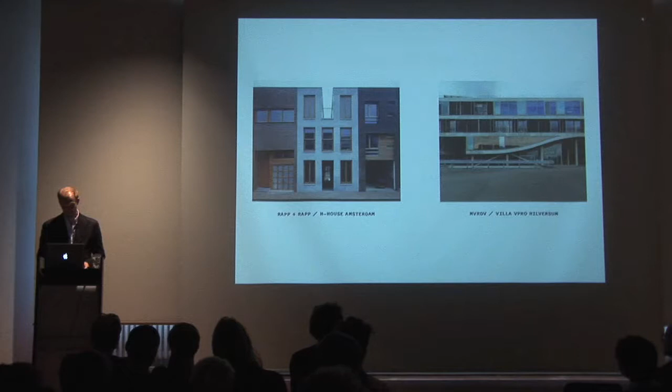And of course there's common ground between these two worlds, and I think this also reveals a bit of a dilemma, a productive dilemma. We try to find a balance between these two worlds. Now, then I'm going to show you, that's part 3, a cover of an important book for us. It's important because we think architecture should definitely be able to be part of contemporary visual culture. Yet simultaneously, architecture should also be able to resist this, you could say, one-day fly dimension that we find in blogs, Instagram, magazines, and other image dumping media.

Because the problem with this is that it appears to flatten out the knowledge, love, and efforts that builders and architects are doing in the making of a building.

For me, it's clear that architecture should not attempt to keep pace with the speed of these everyday digital environments. I'm actually convinced that the design of a layered and ambiguous building is a strategy of resistance, or of survival even, by simultaneously offering a certain amount of instant gratification, yet avoiding the possibility of a singular reading.

I would say the seeking for complexity and even contradiction would be a way to make an intriguing building and to open it up for more discoveries on several scale levels. And this sometimes brings us into the league of postmodernism.

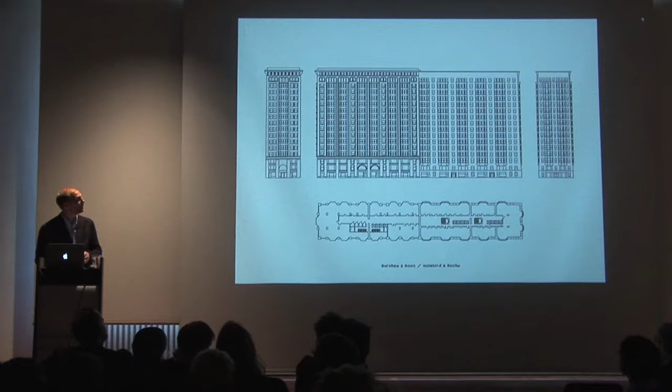So this part by Holabird and Roche is a complete steel structure and was the material of the future at that time, and sped up the realization time tremendously, while this more abstract building part by Burnham and Root is one of the tallest brick structures in the world. It's about 17 layers, and it's load-bearing brick combined with some steel reinforcements, but the main material is brick.

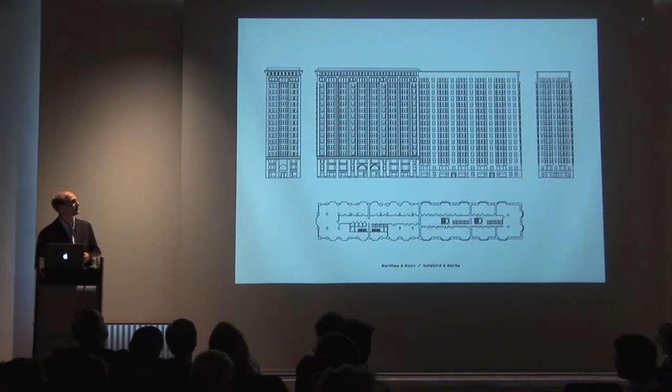And the whole idea of decoration is completely different, because this part, the more massive part, is designed as a monolith. The beauty about it is that all the decorations come from the volume, or if you like, the sculpture of the volume itself. So there's not a strict division between plinth, middle, and top.

No, there's a big belly bulking out, which actually makes the plinth, resulting in reliefs of almost 75 centimeters. And then the bay windows, or oriels, have beautiful rounded bricks that actually add up to the plasticity of the building.

You get the feeling that the bay windows actually bulge up out of the surface of the facade. This is the last image I'm going to show of this building: the corner, the edge of the building, starts very sharp and then goes up all 17 floors, ending in a rounded cornice, but that already starts here.

Very refined and beautiful. In a rather abstract way, you could say it simultaneously celebrates the possibilities of the material of brick.

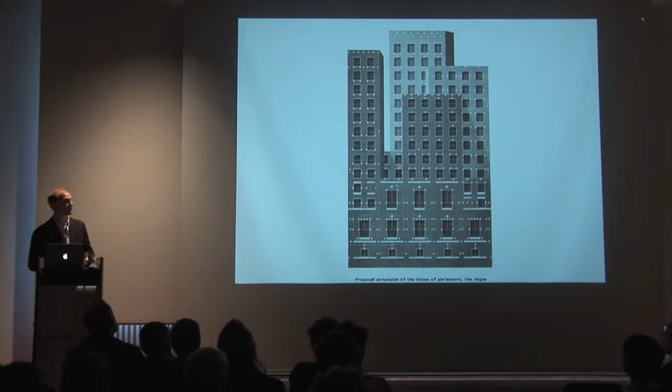These drawings are also helpful to formulate themes for facades or thoughts about decoration and how to relate to the existing neo-Renaissance complex of the Dutch Houses of Parliament.

We also make a vedute, where we make a combination of our own buildings with buildings of colleagues and people we admire, and bring them together in a collage. The act of drawing is something we take very seriously and also see as something to engage with and as a field of testing.

When we were invited to take part in this exhibition in the Deutsches Architekturmuseum in Frankfurt, we did a proposal for a small set of objects, and we had no clue what they meant, and gave them a title: The Good, the Bad, and the Ugly.

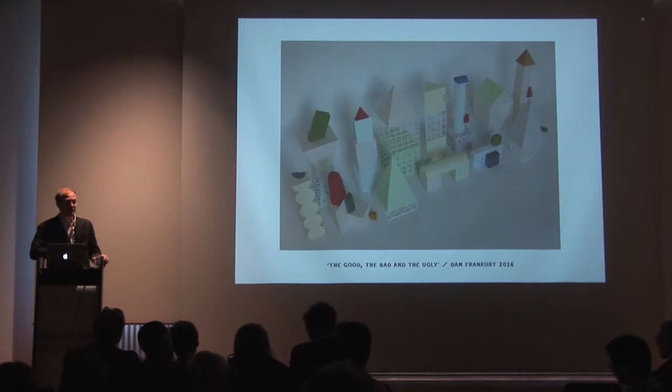You could say the making of these plaster objects, we imagined them to be buildings and simultaneously be objects. I would say the biggest object is about this high, so they're really small. And only later, post-rationalizing, we try to give meaning to them sometimes, which is also valid.

So we then used the things we found for an exhibition design we were invited for at the New Institute in Rotterdam, and then we used the things we discovered to make bigger pavilions in an exhibition, which was about the surface of things.

For us this all is part of 'make no little plans,' but give meaning to even the small things you do. We try to avoid making everything heavy. We try to see this as one big field for playing, testing, and trying out.

Now, this is one of the oldest projects we did, the pavilion on the River Maas in Rotterdam. I always like to tell a bit about it because it's such a funny project. It is a temporary structure in the city center of Rotterdam.

So quite a central spot, and it was a small competition. We were invited to take part to make a pavilion for the city beach. Now, let me explain a bit about the city beach. You will find this in every city, like Berlin and Paris and other cities in Europe as well, where city dwellers are offered a small beach to avoid traveling to the real beach.

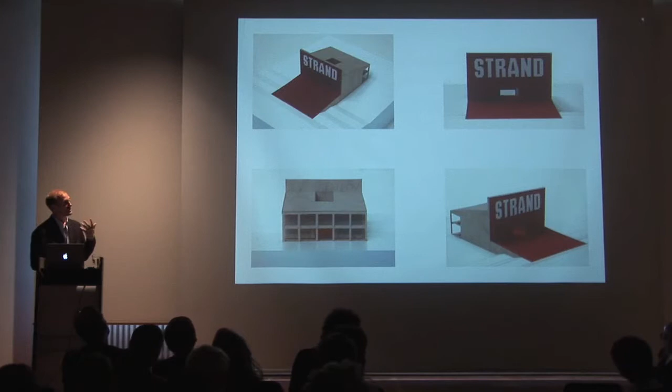Our beach pavilion is something that did not really engage with the sand, I would say. It tried to make two faces, one to the beach itself and one to the city. We had large discussions with our clients to keep the announcement, the billboard, clean, and not to write Coca-Cola on there, but to announce 'strand,' which is Dutch for beach, and treat it as an ironic billboard for what was happening behind it.

As you can see, we managed to keep it clean. There's only a small sign here. It's a combination of several typologies: a billboard combined with a small cabin. It's a wooden building with a steel structure, clad with wood.

We combined the typologies of a so-called gatehouse with the idea of signage, publicity. We were completely intrigued by these beautiful pictures by Berenice Abbott, taken in New York several decades ago, where you can see the signage sometimes completely taking over the building, so you sometimes even have the idea that there's also a building behind the signage.

Now we tried to engage with that idea that the signage would take over, because we thought it would be important to be brutal and bold and visible in the cityscape. In the middle of this billboard, there's a hole. When you are welcome, the gate is open, and when you're not, the gate is closed. Behind the gate, there's a hole in the roof, so the light shines in, which makes it more attractive to enter.

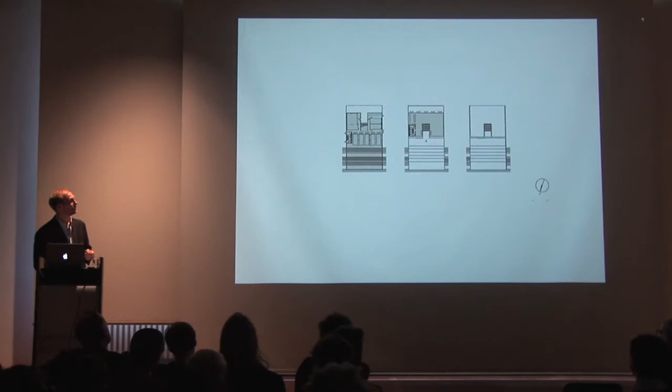As I mentioned before, it's like a Janus head, the building. So big to the city and small and intimate to the beach, where it has detailing, where it has materiality, doesn't need to be abstract and big anymore. Complete different character. The character also refers to, I would say, American rural typologies.

I will tell a bit about that later. First, I show you the plans. On the ground level, there are containers and a kitchen, and on the first level, where you enter, there are the toilets and a bar.

This is the section. So if you choose to go straight ahead, you will go down the stairs and immediately end up in the sand with your feet.

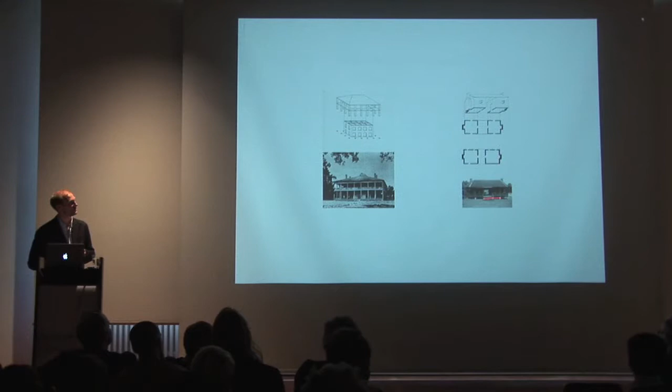For this character on the beach, we were looking at these nice rural typologies that you find outside the cities in the United States. Typologies like a planter's house, where you have a veranda going all the way around, or a dog trot house, which is a very strange typology where the house gets split into two and has a gap all the way through. There are several stories about why it evolved like this, but one is that the wind blows through and there's natural cooling. The other story is that the sheep were not daring to cross this house, so they would always stay within the fence here, but I'm not so sure.

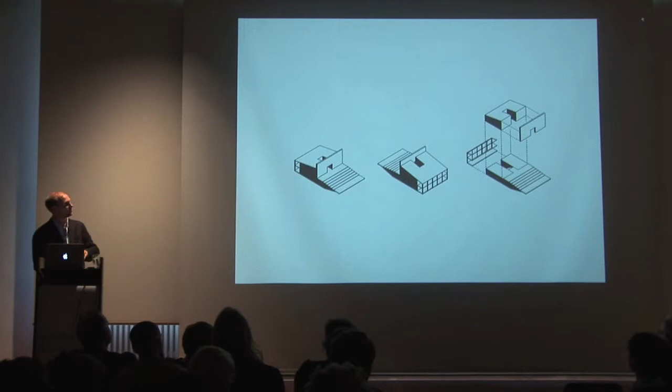As you can see in this axonometric, we try to clearly combine these elements and bring them to one singular form again. It was quite a popular spot. It was there for two times, and the deal was that the pavilion would be there for three years.

It's non-insulated, so it's only there for summers. But then it became a tiny bit too popular because there were parties organized, and in one of the parties there were the Rotterdam hooligans, and they made quite a riot with the police, and then the mayor of the city decided to stop this beach here.

So no pavilion anymore. The pavilion got sold, and I think it's now somewhere in a recreation camping park in the south of the Netherlands. And we don't dare to look at it anymore because we kind of lost track, also on purpose, because at a certain moment you also have to let go your babies.

Although we love this one very much, it was also our first lawsuit where we tried to be in control as architects about what happened with the pavilion. But in the end, I think it's a bit connected to temporary buildings that at a certain moment you have to let go.

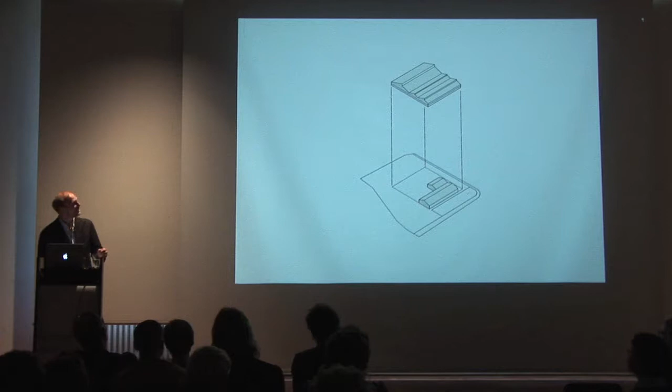Now, this was the existing complex, and the client was doing a lot of business with architects, but needed a renovation of this complex, and was a bit shocked that he did not invite an architect while he was already talking with a contractor to do a renovation and an extension. So he called us and asked whether within the bandwidth of the limited amount of time we would like to think about what we could do with this family of production facilities.

And we were, of course, bound to the existing grid. We looked at what a factory hall actually is and what is, you could say, significant or characteristic. And we thought the shed lights would be a beautiful motif to use.

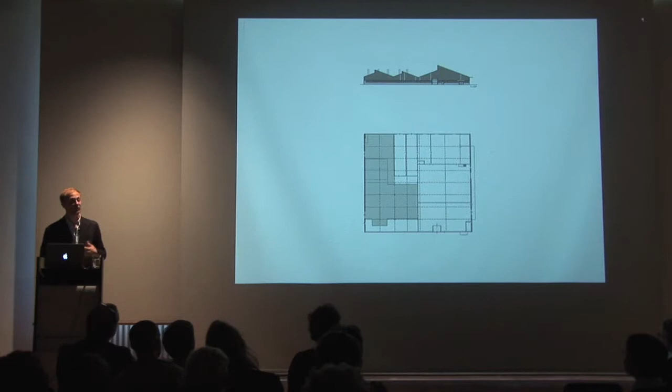The gray area is the existing, the white is the extension, and it's a division into 3 halls, you could say, or 3 houses that are family. Some are higher, some are lower, and they're family because of their basic form, grondvorm, you could say, with their sheds. And of course, also the color brings them together, and the plinth binds them together.

Now you have to imagine that this is quite a dirty environment, a production facility with ovens in there, heat, very warm, and the area around is where all the ground and the clay was parked, and then would be brought in by a shovel inside. The clay itself is brownish, so we thought it would be very wise to make the plinth of the building also brownish.

And then when it comes out of the oven, it's red, so we also thought, or orange red, that it would be wise to use that color for the aluminium plating of the top of the building.

And although we had several discussions with the client to use his beautiful material for his own factory, he was afraid that it would not be able to resist the tough environment of this utilitarian building, where the shovel would hit the plinth and demolish the beautiful tiles.

Now, it's a very simple building, and the inside is, as you can see, loud and dirty and light also. And there's one place in the building where you can see where you could say the human scale, or the people are really invited.

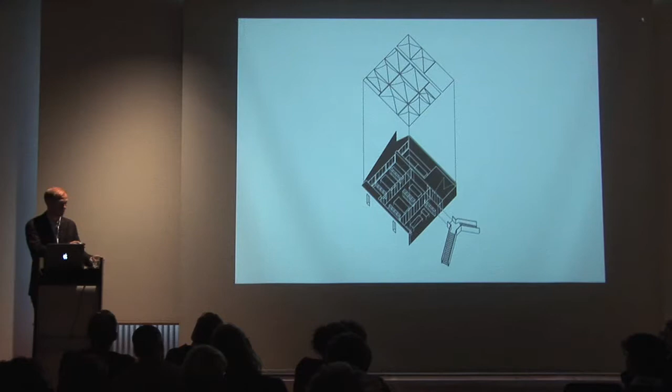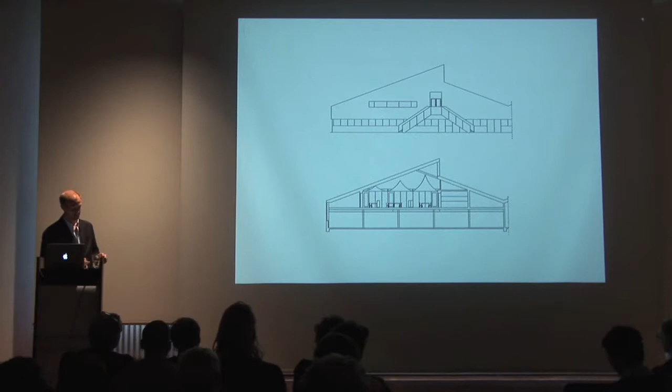And all these rooms got their own textile ceiling, their own shape that anticipated the section of the existing building. As you can see here, it's a very simple tent structure, mainly used for the ceiling, which covered the aluminium cladding of the roof and turned it into a complete illusionary environment, you could say.

Here's the layout again. This is the big stairs, hanging on the facade but also standing on the ground on two very tiny corners, inviting you to go up. A model, and this is the result.

You can see that everything is actually covered behind this ceiling, and the nice thing is that the light still comes in, but in a very diffuse way, and it's also being transported by the textile deeper into the working spaces.

The textile we used is an industrial textile which allows you to ventilate right through. You can peel it off, wash it once in half a year, and put it up again, and then it's back in its own shape. That also makes it possible to put all the ventilation and the artificial light on top of the ceiling. So it makes it quite a tranquil environment.

We were also invited to design the cabinets. We covered the cabinets with felt, and of course the floor is also covered with carpet. The only thing we did not manage was to cover the walls with the same textile—that was one bridge too far for the client—but the rest is all, I would say, rather soft.

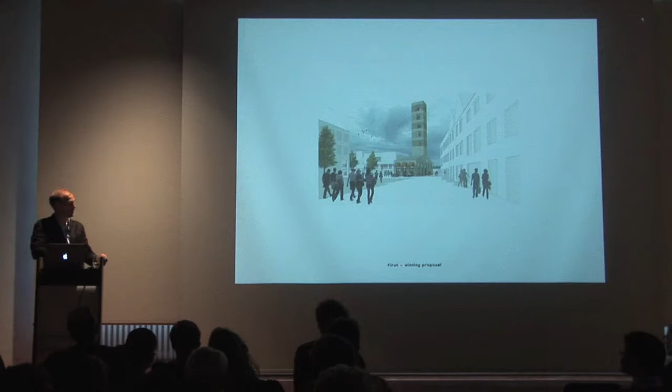So the project developer gave us a phone call and told us we have a problem, and if you don't solve the problem, then you lose the commission, because you need to be clever now and make me happy, but also the urbanist happy, because I am not going to make a very substantial tower here. All the people in this village live in small houses with a garden, and I'm not going to sell any apartment here, so don't even try. Now, the nice thing of such a development is that it forces you to reformulate what you are actually doing.

So we changed our design, and actually we changed the whole approach, because it forced us to formulate what kind of building it should actually be. It was a non-religious, important building with a civic understanding — it should be able to play a role in the collectivity of the structure of this village. And we started thinking of what kind of things we found on market squares in older historical towns in the Netherlands.

And of course a town hall, a church, but also a trade building. I think it's also in Germany and in Flanders. These trade buildings are very specific, strange, typical buildings with strange proportions, richly clad, at least to Dutch standards, with natural stone, so not brick, a lot of decorations, and most of the time they're standalones, and they have a very typical division. So the ground level is very high and very open, so the trade would take place there, the waging, I think the German word is Waage.

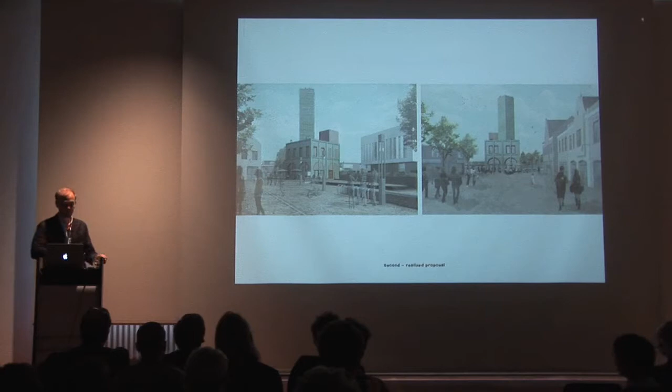This is the scheme where you can see the two towers, and why two towers. One tower has the function to be visible from far away, that's the big one, and the small one is a tower for access. That's what we learned from old fortresses. It's completely normal there that you have a small tower on top of the tower, or a small house, I would say, on top of the tower, which contains the staircase and is, in our case, also insulated, while the high tower is not insulated.

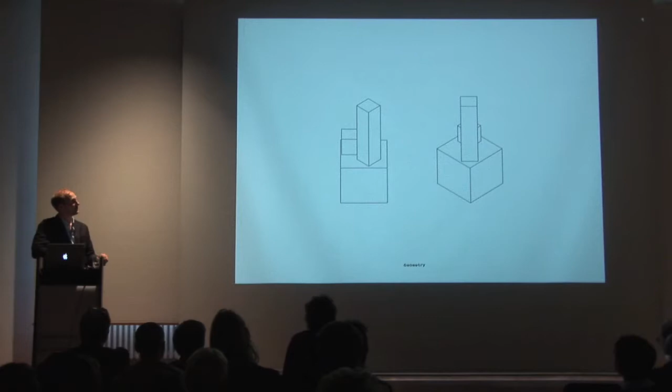In a way, you could say it's a folly or even a billboard, because it only wants to signal that the village of New Bergen is there. And in the plinth, we thought that we would make a bar.

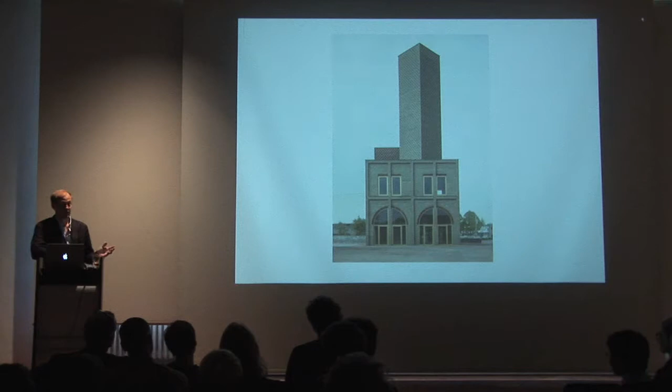We have more pictures. So it was visible from all sides. Yet, we did have to, of course, make some utilitarian parts that would actually evolve into something like a backside, or at least close some of the parts of the facade.

But the first thing we did was to make a grid that would bind everything together. That's a grid that goes all around and makes actually the first order in the facades, and also determines the scale, the verticality. And then behind this first layer of the grid, we placed the windows. And the windows change per side, so that makes that a building has different faces, if you like, to the different sides.

So on the market square it's more open, and on the other sides it's a tiny bit more closed. So by binding the windows together into one window and separating them on other sides, there's also something happening with the scale. Sometimes we close the arch, and sometimes we open it, and therefore it's more open and visible what is happening inside.

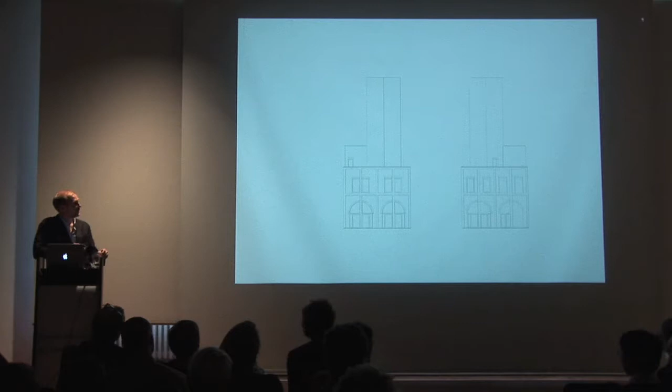We also wanted this to be a very joyful and happy building. I will show you later how that works.

So you enter here or here or here, and then you ask the bartender whether you could go up. So there's always somebody in control. Then you would go here, all the way up.

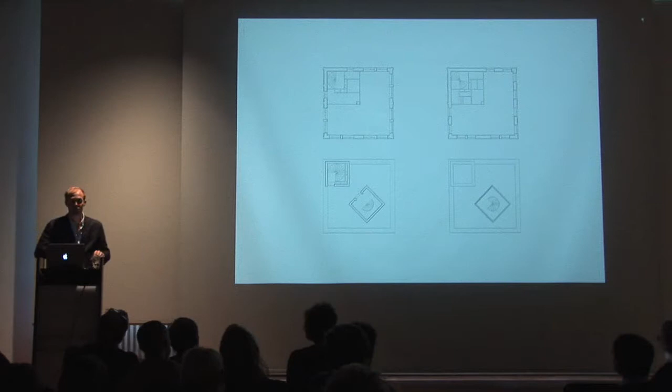There's a floor in between—that's, you could say, room for celebrations or meetings. And there's an in-between room for the toilets. You would end up here on the first balcony.

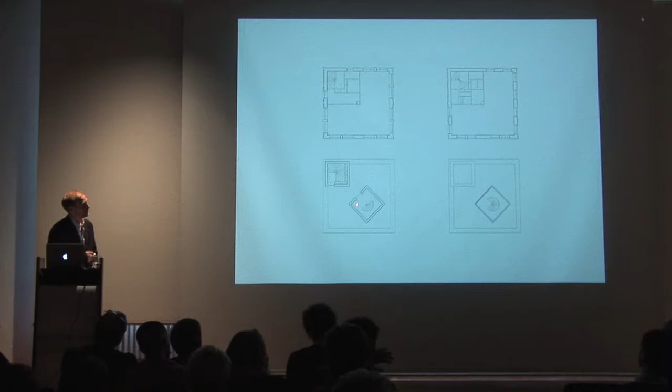On the balcony you'd be able to look over the market square, so you're relatively close to the ground. Then you'd enter the second tower, and through the spiral staircase you'd walk all the way up, and have a beautiful view over the landscape.

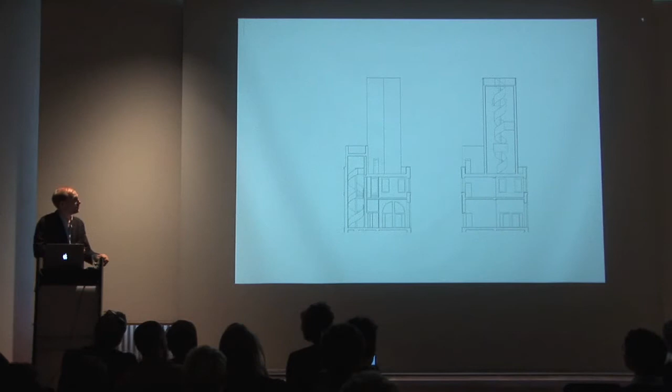For us it was also an experiment, because at least I was taught that you should celebrate the beauty of the pure material, brick. Here we did something that was completely not allowed—we started to paint the brick.

You could say we always explain this as a red building which we painted partially green. During the production process, the red brick is covered on two sides, one stretcher and one head of the brick, with cement or slurry—greenish slurry.

That allowed us to suddenly have two colors and to start painting and using patterns, giving significance to the building not only from the plasticity of the facade, the depth of the grid, and the beams and arches, but also the layer of patterning became activated.

We did research on local patterns, and actually used a lot of patterns found there in the local brickwork. This one not—that's a Brazilian bond. That's for the high tower, where we made holes in the brickwork to let the wind go through, which is good for construction. And we started to pattern the building.

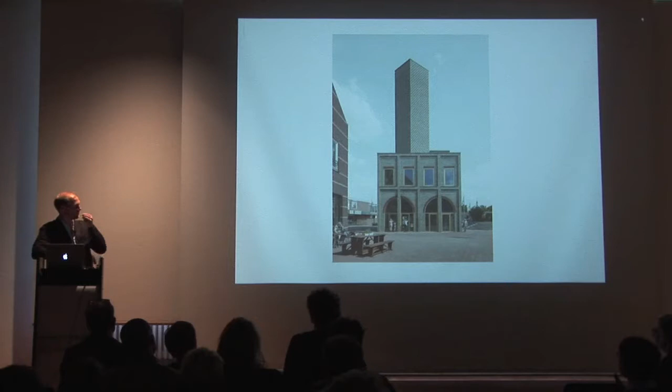Now recently the bar was opened, luckily, so now you can enter it, and we hope people start engaging with it more. When it was just opened, although we had used patterns from the regional brick traditions, people thought there would be a mosque in their small village. We were heavily surprised by that, naive architects, because we thought we'd made something that would fit there perfectly.

But for them it was an alien thing, something so strange that they, well, not completely protested it, but were very, very cautious with it. Then more and more architecture tourists came, and they started to love it a bit more. That really helped.

I think it now found a good place, and eventually they will embrace it more and more, especially now it's really opened. Everybody could already walk up the tower, and the tower would be closed off in the evening, but it did not contain a bar yet.

Here you can see the brickwork, and I hope you can see that the bond switches over the corner. This is the view from the top, where you can see the towers of the neighboring villages. Like I said before, this is actually nothing more than a folly.

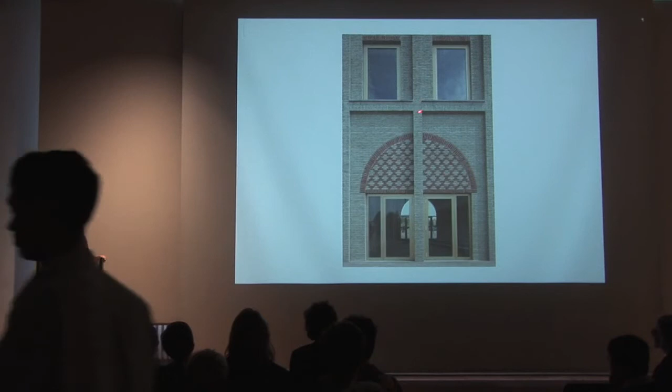We also did a lot of tests with the depth of the grid, because at a certain point when the grid gets too deep, it doesn't act anymore as something melted together with the wall, the back wall, you could say. What we liked so much was that it was ambiguous, that it melted together as one system or one surface, and that the beams and the grid would actually bulge out.

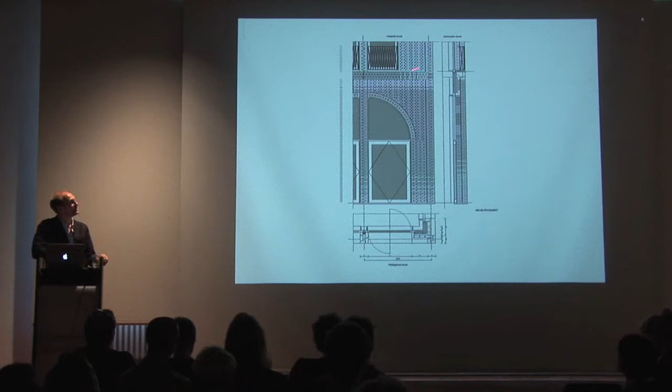Now, that's very nerdy, of course, to talk about these kinds of things. But it's also very nice, because that's what we like. We like to have a complex strategy, you could say, about the performance of the building. But we always fully engage with the detailing and the way it should be built, because the making is absolutely part of the thinking.

Later, we found out that in the municipality Bergen, the authentic historical village, there was a graveyard, and on the graveyard there was this beautiful ruin of a tower. We only found out afterwards, but it contained a beautiful stacking of different layers, almost a palimpsest way of dealing with different stone types and brick types from the area. It's a ruin, and now we can only hope that this landmark will not disappear at a certain moment like the beach pavilion, but will evolve into a beautiful ruin.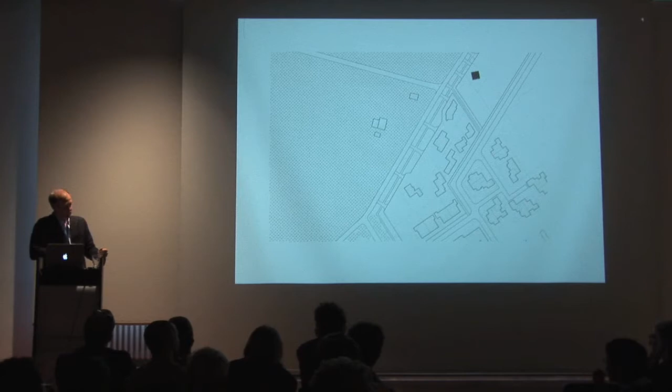So a small piece of land, a small budget, and the wish for a garden, and the wish for a very big house. We were completely challenged by that question, and we proposed to go for two models.

One model would be a so-called bungalow, filling the complete plot with a one-layered house, with a big patio in the middle containing plants and trees, so you would live around your garden, which was in the center of your house.

The other option was the opposite: to make a very compact footprint, and organize the house in a vertical way, like a small tower, with a barrier or garden surrounding your house for reasons of privacy as well.

They chose the latter, so we call this a tower. It's of course not a tower, but a vertically organized house with a very compact footprint.

We make images like this, not to prove that we have a linear design process, not at all. But it helps us to make these kinds of images to sharpen our thoughts about how it could appear, how it could perform, what the expression of the building should be. It's a way of testing, actually.

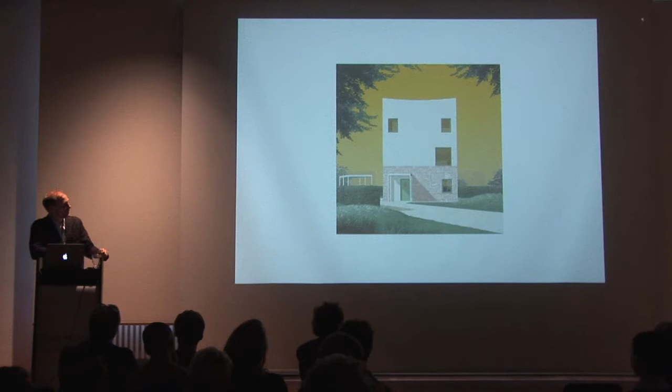Besides making models, we also make these kinds of drawings. For us it was clear that we wanted to use brick, because we thought we could use one type of brick for the interior and exterior of the building, and be relatively cheap by using this one brick. It was a red brick, and of course we then decided to paint parts of the building to come closer to the request of making a white-ish environment, so all the villas would be white.

Then we started to make window patterns that perform per side, and sometimes ignore the other side. So it's a very frontal development of the facade, almost graphical, like four cards being put together, each containing its individual face, so to say.

And the windows do not reveal anything of the interior. They have their own logic, and what binds them together is the idea of a plinth: the plinth reveals the bare brick, and the top covers the brick with whitish cement to give it a kind of lightness. We also pulled up the corners to even enforce the idea of lightness, to make it almost appear like a textile coverage.

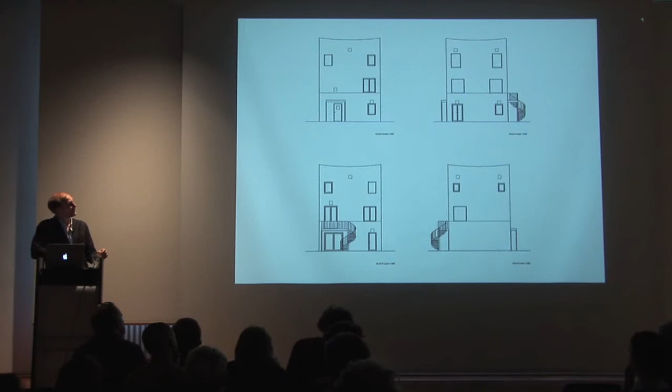But I was talking about the facade, and I will come back to that a bit later when I show the sections, because actually the surprise is more in the section of the building.

Because if you look at the plans, it's rather simple. It's a collection of rooms, always the same on three floors, always the same scheme: three small rooms, two big rooms. We always found it important that you would be aware, when going from one room to the other, of the transition, and the middle room contains the stairs. So here you can see it's always the same scheme.

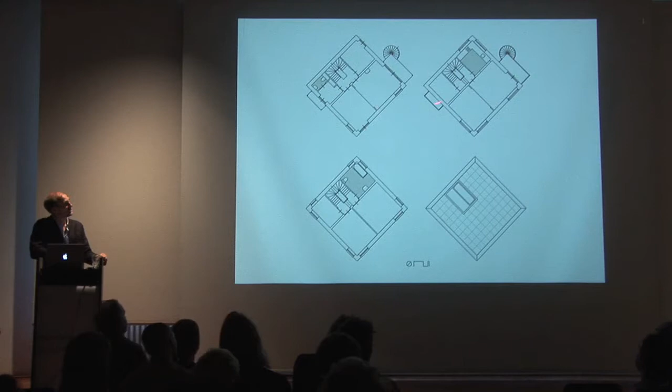Very simple. And then in the section you see that all the rooms have their own individual height, and it's always a development in height which individualizes the room.

We also thought it would be nice to make the rooms interchangeable. Currently they want their atelier downstairs, and want to live, sleep, and have a working room also here. But we can also imagine that after a while they will start living here and working here and sleeping here, so there's a certain exchange or interchangeability.

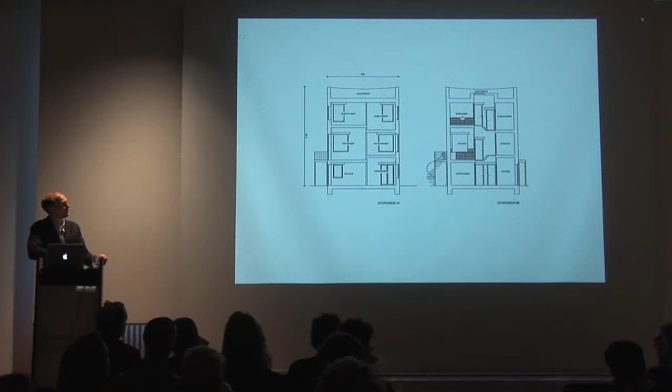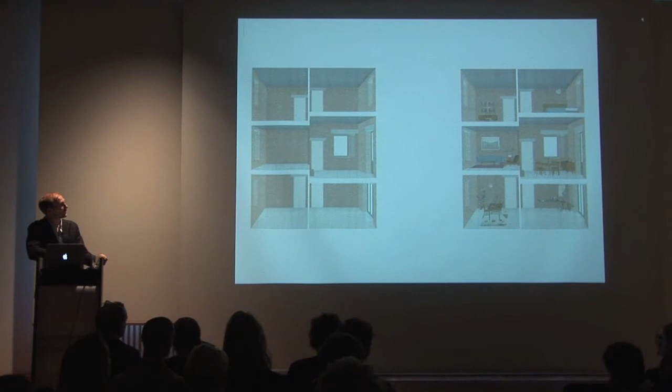As I said before, it would be possible to have a garden around, and the most private side of the building would be the roof terrace. This is the scheme of the rooms, and this is a drawing of the section.

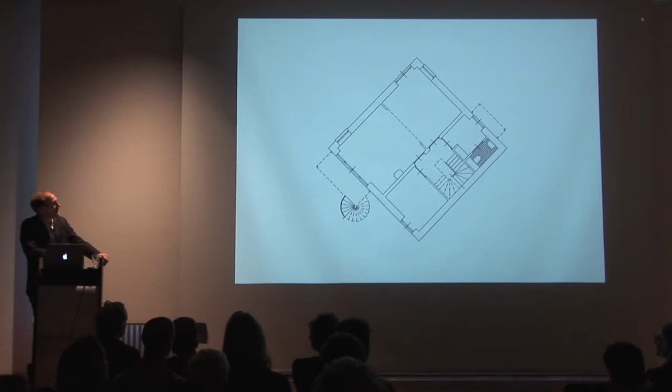We had large discussions with the client about the positioning on the plot, because we started with positioning it right along the road, parallel. Then at a certain point we thought it would become very static to have a big window looking out over the trees, that would almost act as a static painting. Beautiful one, but very static.

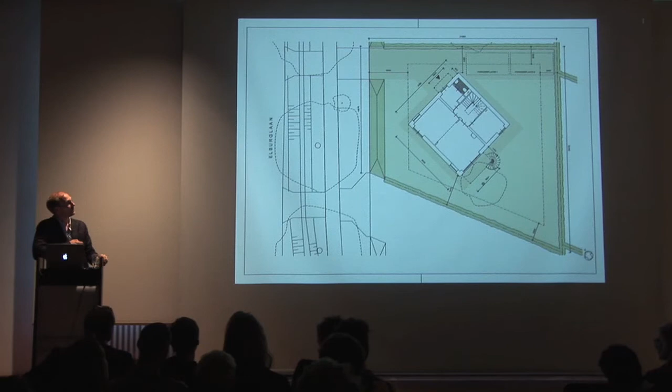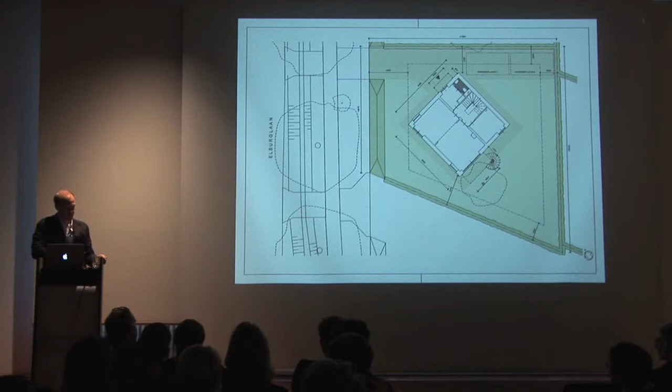Then we said, could we individualize the building by turning it 45 degrees, making it possible to have long diagonal views along the crowns of the trees, which would give more dynamic and more depth. They were not very happy with that idea at first. We stood there on ladders with pieces of windows to convince them, and in the end they were convinced. We are very thankful for these daring clients to engage with such things.

This is the building as it is, not there anymore. The building is still there, but this was the first building in the row, and now it has a lot of neighbors which are very close, as you can see here the fence is still there, but of course the beautiful trees are still there.

I was talking about the neighbors which really come close, they are now like here. The good thing is they also have a nice garden around, but it doesn't provide a lot of privacy. So for real privacy you go all the way up, and there you have a large roof terrace, where you can walk naked, because you will always be covered by the line of the balcony, and that's actually the most private part, between the crowns of the trees.

The brickwork is something we paid quite some attention to, because it is a brick that we intended to use for inside and outside, preferably also one brick which would be insulated. We did not manage, so we went to a classical inner load-bearing structure made out of bricks, and an outer shell out of bricks, but they're in the same system and measurements.

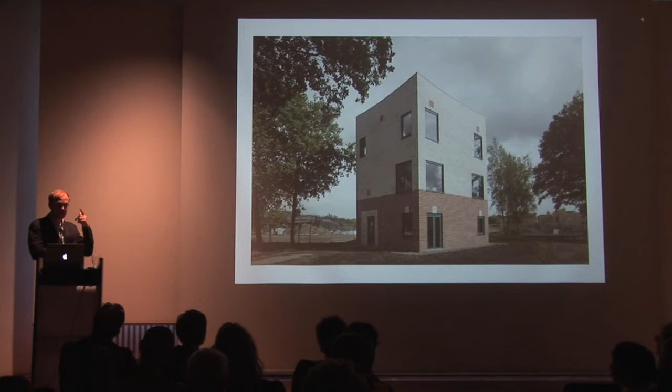When we talk about painting facades, of course we are aware of the people that have been thinking about the use of color and paint and decoration as well. We find it hard to make this into a manifest or a very sharp statement, but we do see it as something which is very useful and beautiful because of its directness.

That's a beautiful ambiguity. Next to that, in the Netherlands there is also a tradition of decorating brick buildings. That tradition in the Neo-Renaissance was to not embellish it with expensive marble or bluestone, but just with cheap plaster or white paint, making all kinds of patterns referring to building elements like keystones - but they're actually more a painting than that they really have this function. And they do have a function, I would call it scale, beauty, and that is a difficult function, of course, but it's something that we try to learn from.

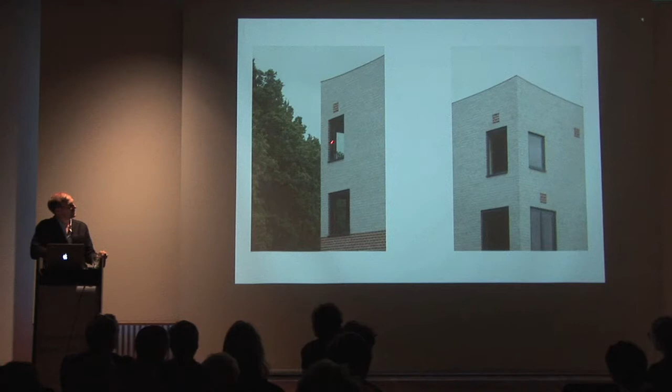They bulge out and give this notion of texture to the top, bulging out here to give more tactility to the building. And when you start using such a layer, a white layer, here in the depth of the window you stop.

The nice thing about this is that it brings the plinth and the top closer together, although there's a very strict separation. People passing by wonder whether the inhabitants are going to paint this, and ask the clients whether their house is actually finished. But they got used to it by now.

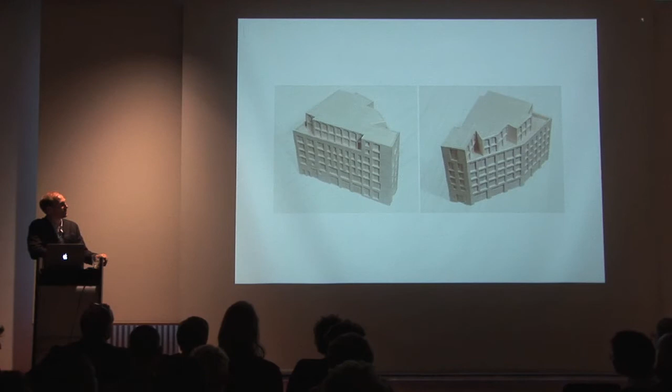Now I'm going to stop, but not before telling you we're not only doing small projects, we're also engaged in bigger urban projects. We really like to think about how a building should perform in a city environment. This is a competition we lost for a housing complex on the market in Groningen.

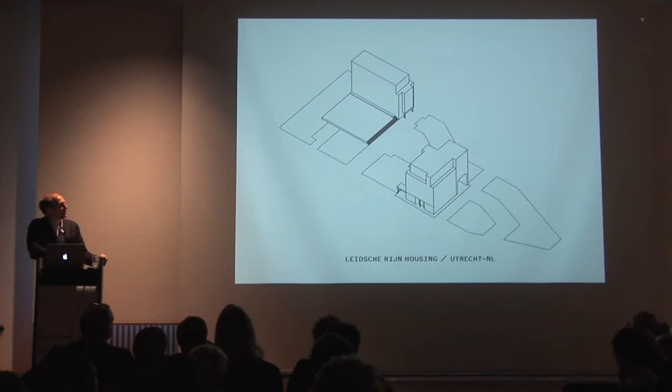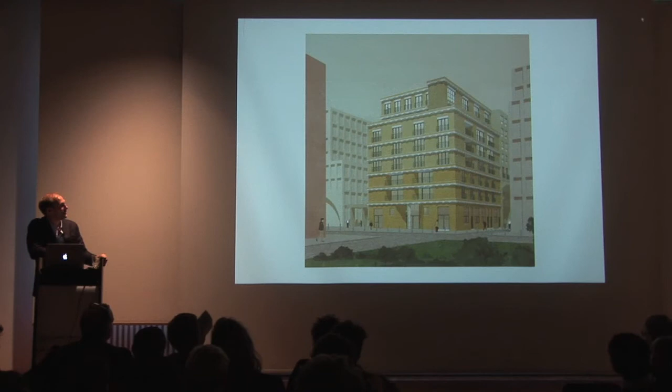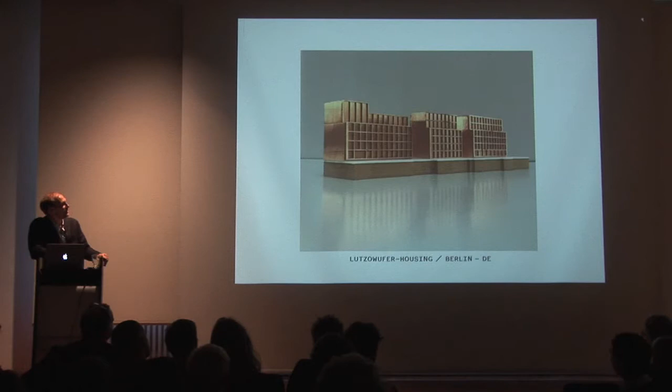That's 600 units for a new part of the town of Utrecht. We did this in a team where we make urban blocks, housing, and this was a competition we lost in Berlin on the Lützowufer. We had quite tough competition - 3 housing blocks, about 60 units.

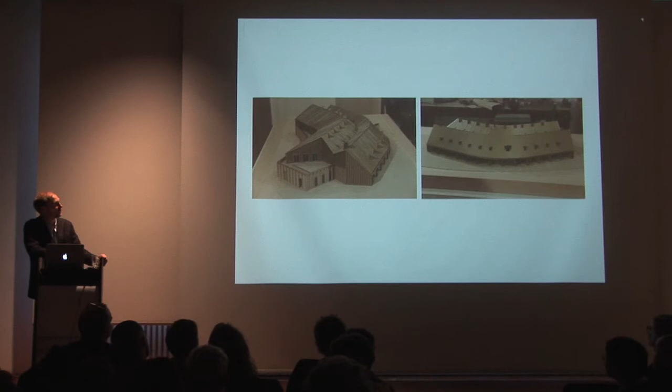And this is a competition we won - a visitor center for the National Park Hoge Veluwe, one of the biggest national parks in the Netherlands. It's not a very big building, about 3,000 square meters, but it gets a lot of attention because it's the main building in the park. This is a sneak preview, this is the model, and it's currently under construction. Yesterday I was there, and the foundations are being poured out of concrete. It will open in June next year, so there's not more to tell about it right now - that will be for a next lecture.